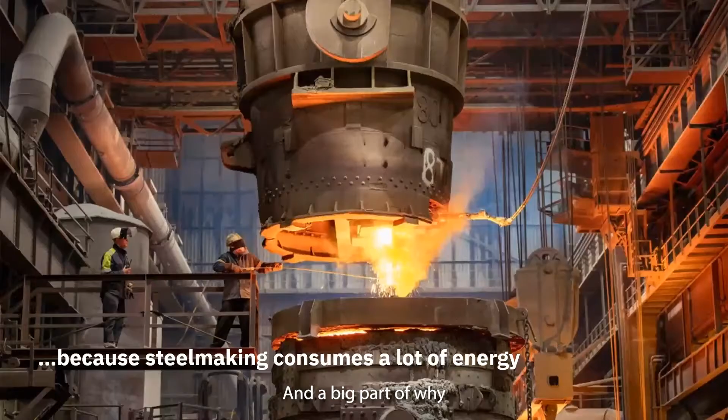Steel production is one of the largest man-made sources of greenhouse gas emissions. 7 to 9% of all fossil fuel-based CO2 emissions are derived not from the metals industry in general, but specifically just from the steel industry. For every 1 ton of steel that's produced, 1.85 tons of carbon dioxide are produced. And a big part of why is because it takes a lot of heat to transform iron ore into steel, and that energy comes from burning fossil fuels, often coal.

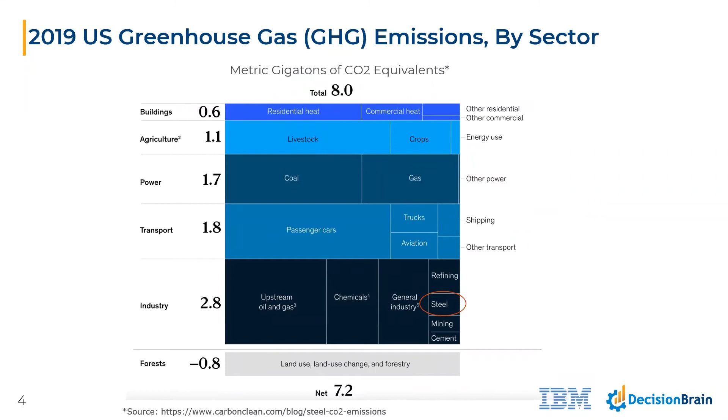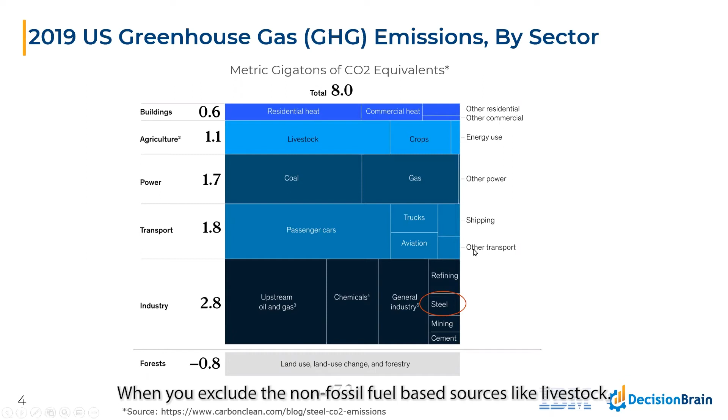Here's a 2019 breakdown. The biggest emitters are actually on the bottom, and you see steel right there in the lower right, comprising a total of about 7 to 9% when you exclude the non-fossil fuel-based sources like livestock. The last slide was focused on greenhouse gas emissions, but the steel industry generates both greenhouse as well as the more toxic byproduct gas emissions, which, similar to carbon monoxide, are flammable. When these gases must be emitted, they're typically burned or flared in order to reduce their toxicity, though the burning does transform them into greenhouse gases.

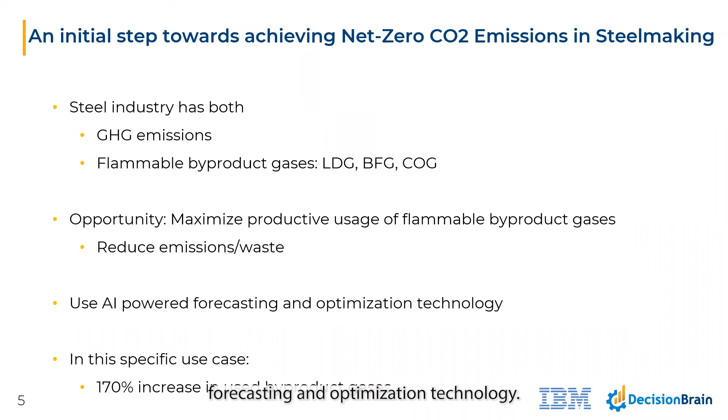The project we're detailing today is focused on maximizing the productive usage of these byproduct gases so that instead of flaring them early, they can be used downstream, thereby reducing overall energy waste and the emissions that result. The solution was developed using a combination of advanced forecasting and optimization technology. Now let's dive a bit more into the details.

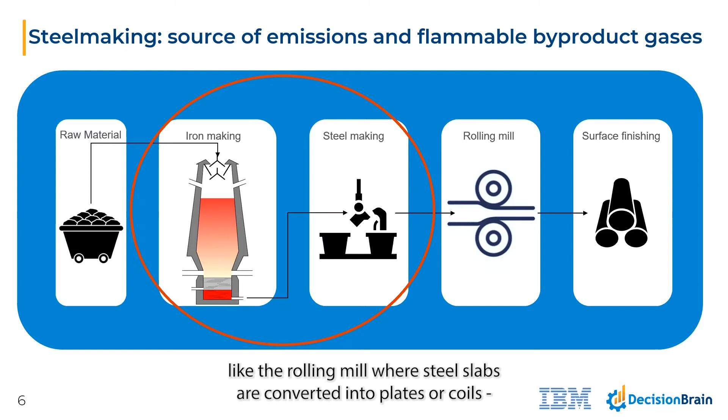Let me start with a couple of diagrams on the steelmaking process. The important thing to note here is that steps 2 and 3, which are the iron making and steel making steps, these are where the flammable byproduct gases are produced, often in excess, which is why they are burned or flared. Now, the following steps, like the rolling mill where steel slabs are converted into plates or coils, there are very complex scheduling decisions to be made in each of these downstream processes as well. And another great opportunity for the application of optimization technology. However, the focus of this presentation is on the emissions reduction opportunity, which is greatest in the 2 circled steps.

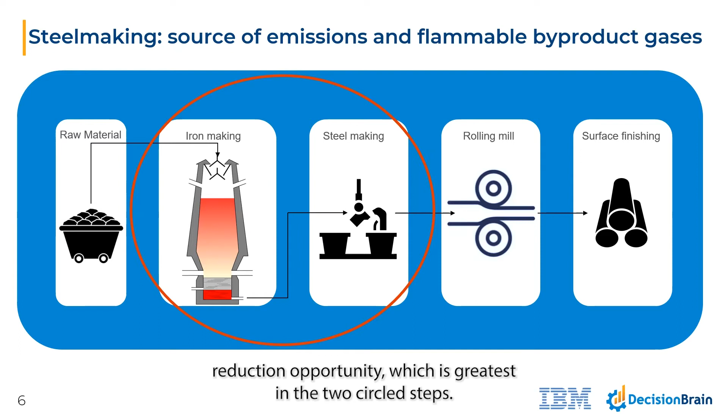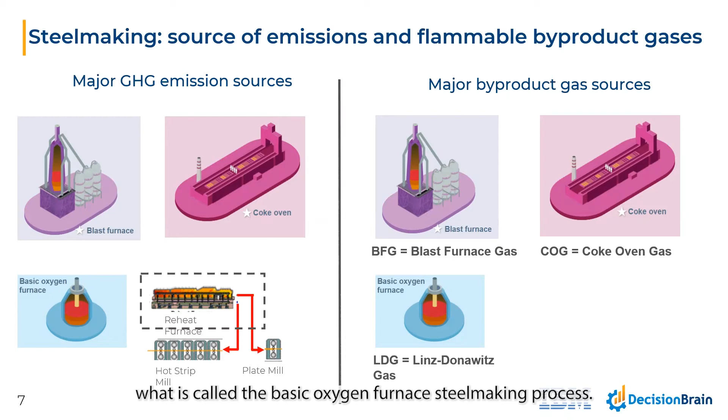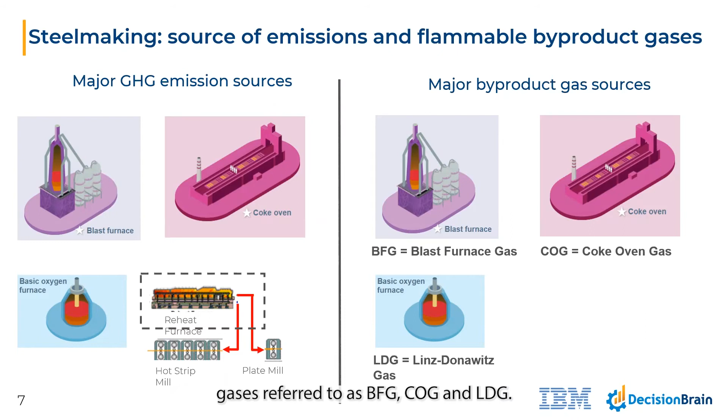Drilling into these steps a little more, most of the world's steel is still produced through what is called the basic oxygen furnace steelmaking process. Raw materials, including iron ore, coal, and limestone, go through a variety of processing steps in equipment like blast furnaces, coke ovens, and others. Each of these stages produce different byproduct gases referred to as BFG, COG, and LDG.

These names are less important than the fact that a lot of these gases are burned off early in the production process instead of being sent further downstream where they are actually useful. And this is the hard problem that we're tackling in this use case: how to reduce the amount of flaring at these earlier stages so that we can be more efficient overall.

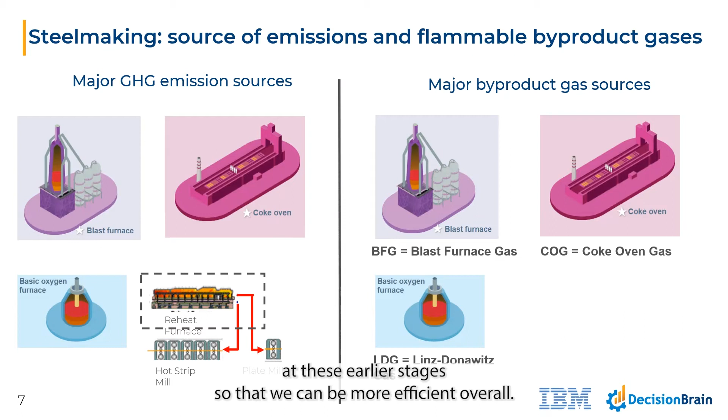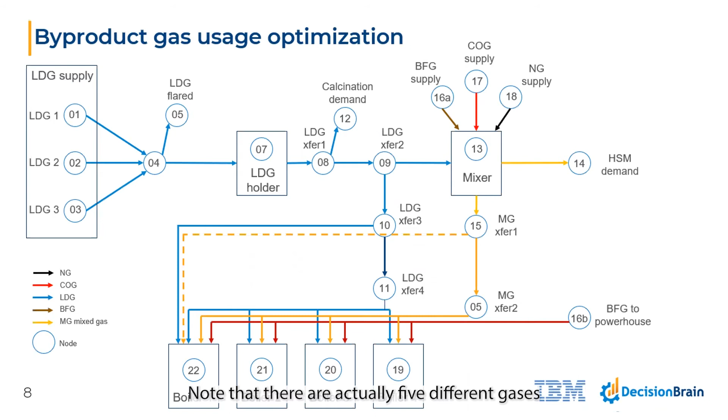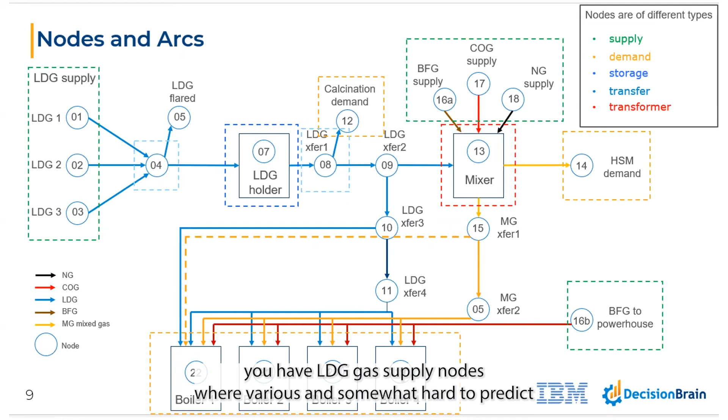Here's one more way to show the process. Here we're looking specifically at how these gases flow through the pipelines and the other equipment that's involved. Note that there are actually 5 different gases we're working with, shown on the bottom left. This network has different nodes and pipelines. The nodes can be supply nodes, like in the upper left. You have 3 LDG gas supply nodes, where various and somewhat hard to predict amounts of LDG come in, which we're going to come back to.

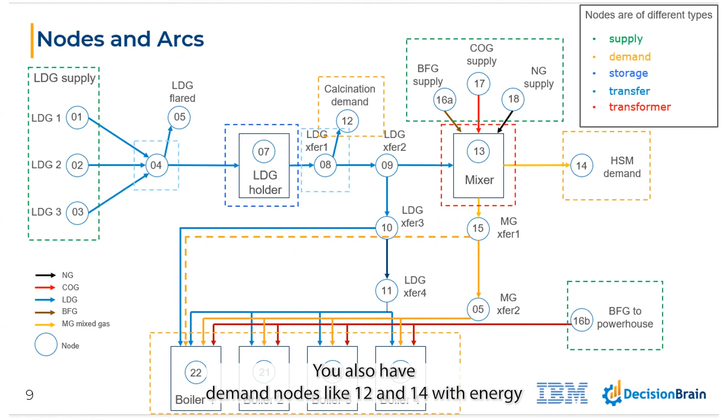You also have demand nodes like 12 and 14 with energy demand that can be partially or fully supplied by LDG. And then you also have storage nodes, where gas can be stored. And another type of downstream consumer is in red, a transformer, which is like a gas mixer. So the first part of the problem is forecasting both the supply of LDG gas that will be coming in, as well as the downstream demand by the gas consuming steps.

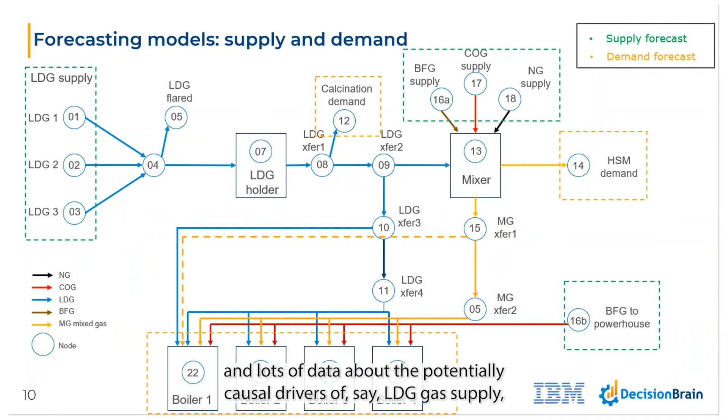Now, there are many complex and sometimes interrelated factors that drive both supply and demand, which we're not going to get into here. But what I will say is that these two forecasting problems are very much like most forecasting problems we see out there. We use machine learning technology to train a forecasting model. And we do this by feeding in lots and lots of data about the potentially causal drivers of, say, LDG gas supply, as well as the corresponding readings of actual supply over specific time periods.

And we do this continually over a time period and then let the AI engines learn and build the model. Then once we have that model, we can apply it in the future to make better predictions. In virtually every industry, the ability to accurately predict is critical to good decision making.

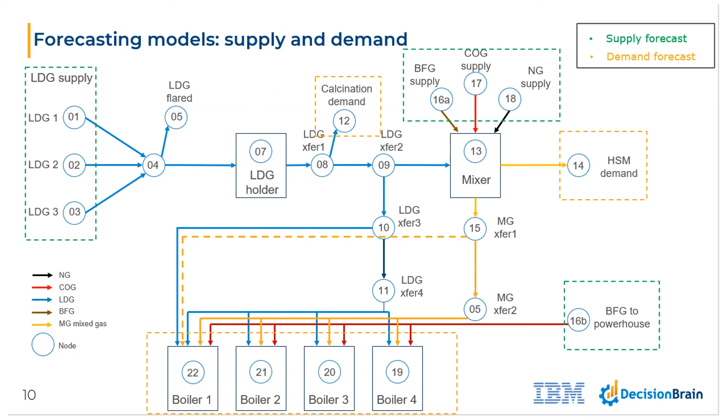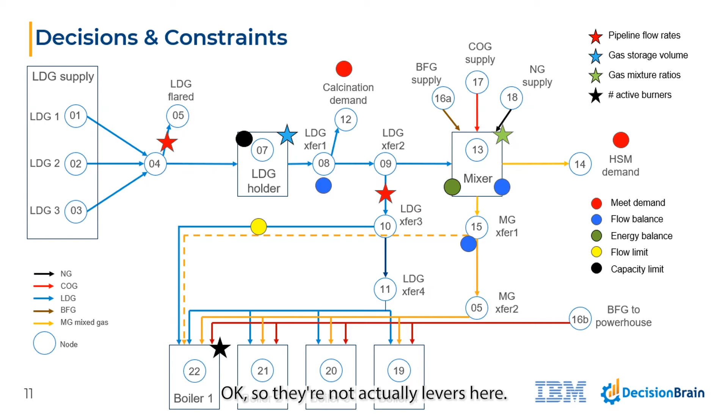So now imagine we've solved the first part of the problem. We have really good demand and supply forecasts. Now we get to the part about what do we do about it? Or what are the levers we can play with in order to minimize waste? Okay, so they're not actually levers here. They're more like gas flow valves, but you get the point.

I've overlaid here with stars the various control points in the process, meaning the points where decisions must be made, like what volume of gas we want to allow to flow. For those familiar with steel manufacturing, you will probably recognize all of these control points.

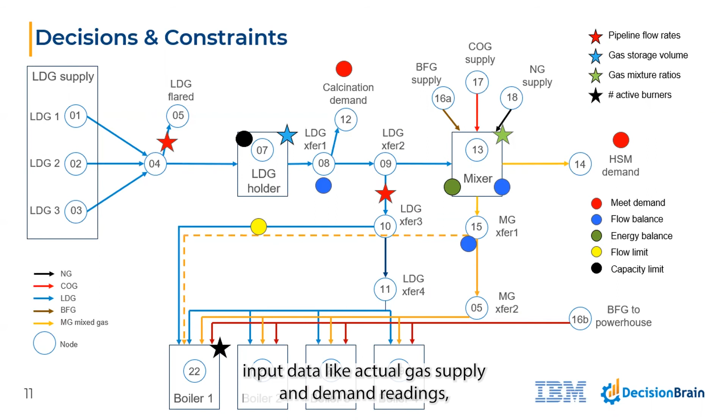But for the rest of us, what's important to note is that in any process or flow in which you have many decision points, which can interact with each other, and when you have constantly changing input data, like actual gas supply and demand readings, as well as forecasted future values, that means you have the opportunity to constantly make sets of interrelated decisions for each plan period. This way, when I sum up the result of all the decisions over the time period, I get the best overall result.

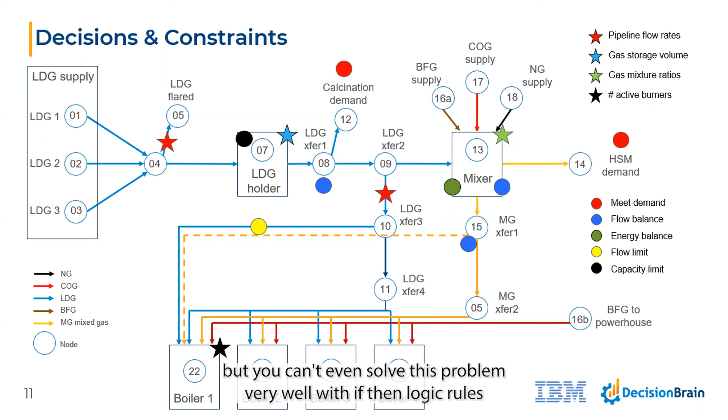But here's where we find ourselves with a really hard problem with way too many possible permutations to choose from. Not only can't you solve this in your head, but you can't even solve this problem very well with if-then logic rules. Rather than being a rules-based problem, what we have here is really a mathematical optimization problem.

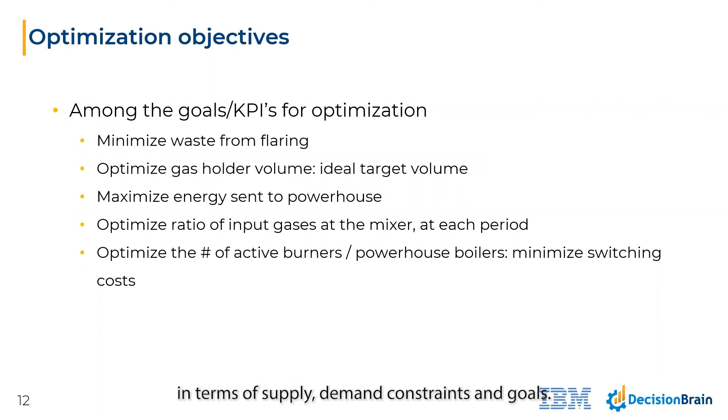In mathematical optimization, we model problems in terms of supply, demand, constraints, and goals. So we already talked about the gas supply and demand points. The constraints are things like tank capacity limits, pressure limits, and many other such rules that either can't or shouldn't be violated. And then lastly, you have a set of goals. Some of the goals for this problem are listed here.

We want to minimize waste from flaring. We want to optimize gas holder volume because there's a performance penalty for holding too much or not enough gas. We want to maximize energy sent to the powerhouse. Remember our first goal about reducing energy waste and emissions? This is how we model that. And finally, we want to optimize the number of active burners or powerhouse boilers because that's a switching cost.

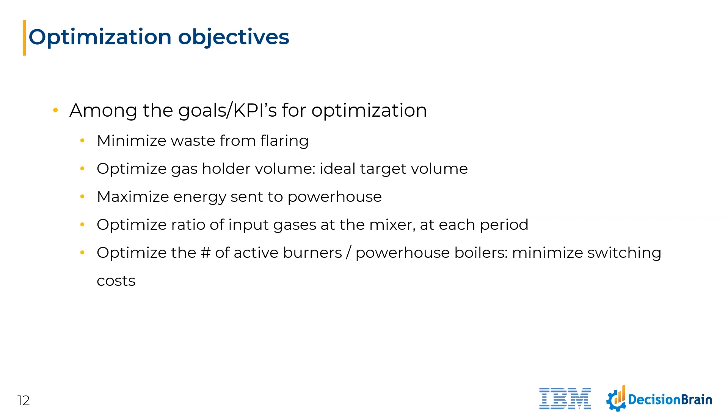So the way the optimization solvers work under the covers to quickly solve this combinatorially complex problem is outside the scope of this presentation, but I will say that optimization solvers are a very mature technology that have been used for decades to solve the world's hardest planning, scheduling, and logistics problems in nearly every industry. And the proof is really in the results.

So now let's talk about the impact of all the work we did implementing advanced forecasting and optimization software technology. This particular client that we have been discussing is not fully deployed yet, but preliminary results have already shown a more than doubling of the amount of LDG that was able to be sent to the powerhouse rather than being burned early. Or put another way, they improved their energy efficiency by cutting the amount of LDG gas that was flared down to less than a third of the original amount. This is thanks to improved forecasting, together with letting an optimization-based system direct the flow of gas along the various pipelines.

IBM and DecisionBrain have collaborated on many projects. Here are a few other examples within the steel industry. One is a large steel producer in China who's also focused on reducing energy costs and greenhouse gas emissions through better forecasting and optimization. The second is an Indian steel manufacturer who is optimizing the scheduling of oxygen generation to minimize waste through venting and realized a 15% waste reduction.

And the third is a Latin American steelmaker who is looking to reduce and save on natural gas costs. And like the case study we just talked about, also wanted to reduce gas emissions. But instead of focusing on LDG gas, they were focused on two other flammable byproduct gases.

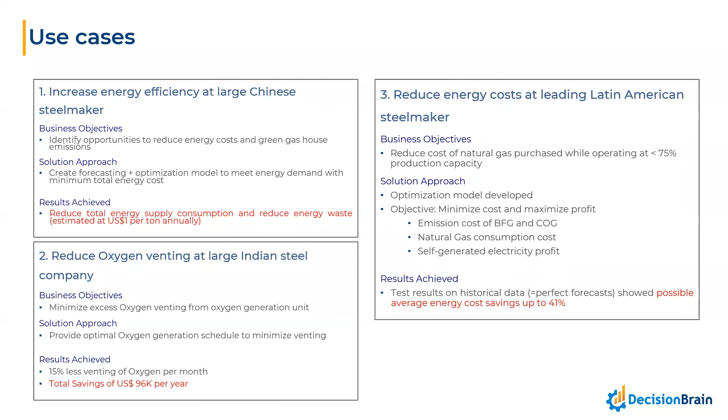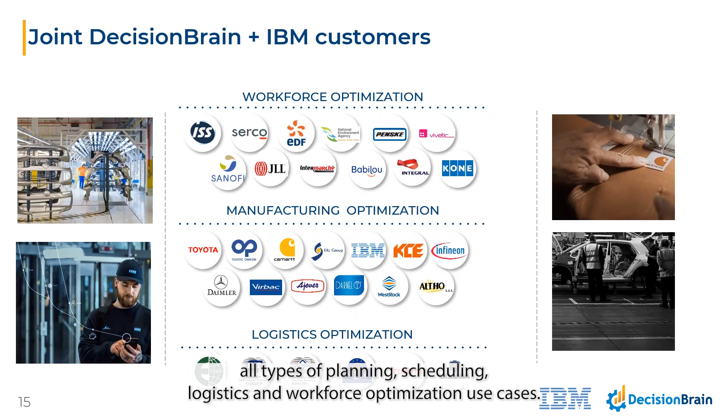The thing to note here is that these savings are not unique to steelmaking. Across all types of continuous and discrete manufacturing industries, it is not uncommon to see 10 to 20% improvement and often more on the KPIs that manufacturers care about, like throughput and on-time orders and waste and emissions reductions. Going beyond manufacturing, IBM and DecisionBrain have delivered optimization solutions to many industries and across all types of planning, scheduling, logistics, and workforce optimization use cases.